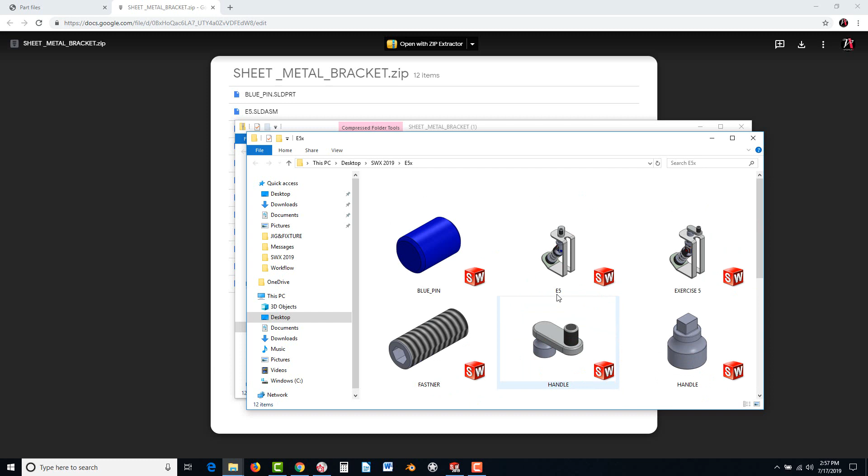Go ahead and start up SolidWorks and go to File, New, and select Assembly and hit OK.

On the left, if there's any parts that are currently open, they'll be listed and allow you to select from those. In our case, we need to direct it to the folder, so I'm going to go to Browse and find my E5x folder. Over here again, if I want, I could click and enlarge these so I can see little images of what they look like. We're going to start off with the sheet metal bracket. Select it and hit Open.

Now, you'll see you can move it and position it on the screen, but I would suggest clicking on the green check mark in the upper left corner. This will drop that part, and that part's origin will lock into the origin of the assembly, so they'll match up. The front plane will match with the front plane of the assembly, and the top and right planes will all align to each other. The very first part that you drop into SolidWorks is typically fixed. You could tell by this little F in parentheses. If you were to right click, you have the option to float it, but we don't want to do that, so we're going to leave this currently in its fixed state.

Let's begin by adding some additional parts. Go to Insert Component, go to Browse, and let's select the yoke male. Hit Open. This one, we actually want to drop not centered on the origin or fixed, just over here to the left, floating by itself. Simply click, and now it's positioned there.

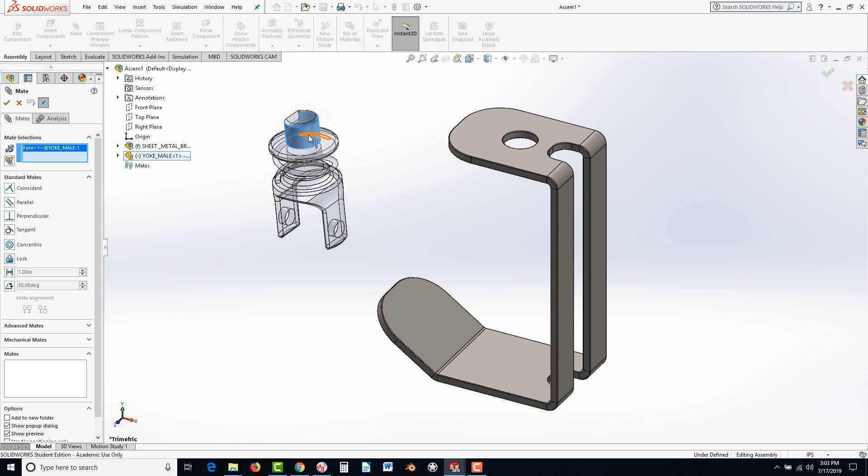So let's go to mate, the paper clip up there. Select this pink surface. We want that pink surface now to actually contact this surface here. Now be careful, you can select the edge—right now I'm hovering over an edge, and you can see it highlights an individual edge there. When we go over the surface, to the right of the pointer we get a square, and that's an indicator that the whole surface is about to be selected.

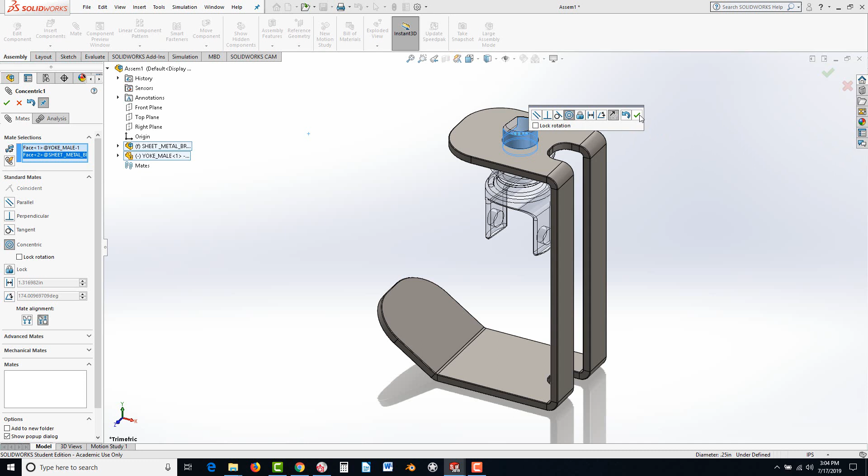Let's go ahead and select that surface, and what it will do is move the part over, and it will automatically pick, based on some assumptions it makes, what would probably be the most likely solution, and in this case it went with concentricity. If we wanted something else, we could perhaps select that, but just be aware you might not have the proper ingredients on the screen to do that. But let's leave it at concentric and hit the green check mark. And up here in the upper left, go ahead and hit the green check mark to exit the mates.

Now let's take a look at what we've just done. Grab the actual yoke with your pointer and your mouse button, hold it down, and now you'll see you could actually drag it up and down vertically, but you can only spin it. It no longer translates or traverses along the X or Z axes. And that's because when we went with the concentric relationship, we've actually removed those degrees of freedom. Ultimately, your goal is to try and remove degrees of freedom to get this in position.

However, if you want to simulate what's called dynamic assembly motion, to somewhat see how parts interact with each other, you don't necessarily want to completely remove those degrees of freedom. So we do want to remove its ability to move up and down, but that's about it. We do want it to swivel though.

So let's click off of it somewhere, and let's go back to Mate and select this flat face. Now actually I'm going to hit the escape key for a moment, and I invite you to do the same. I want to show you what's called the selection filter.

Right click in the upper right corner in the gray area and find Selection Filter in the lower left. It will appear as a series of icons. You could filter out edges, faces, surfaces, bodies, and annotations. We're just interested in filtering faces, and the hot key for that is X, so you could use that instead of the icon.

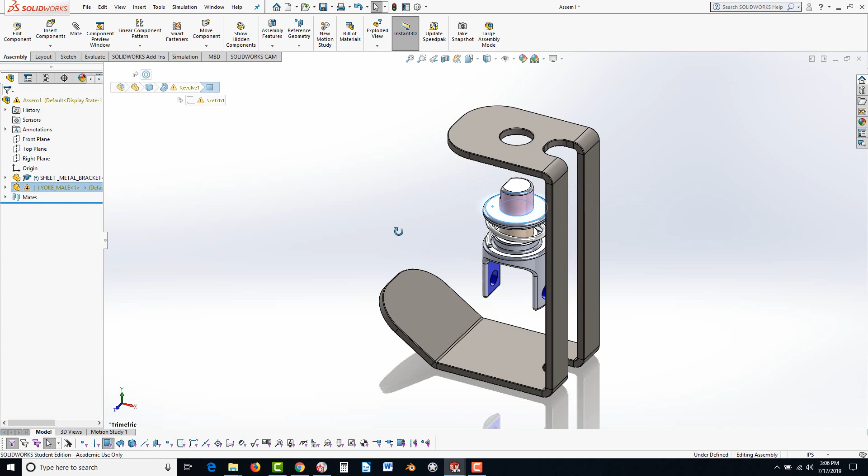Go ahead and select this face here, then rotate your model. I'm holding the middle wheel and moving my pointer up, rotating so I can see the underside of the sheet metal bracket. Go ahead and click on that surface of the flange.

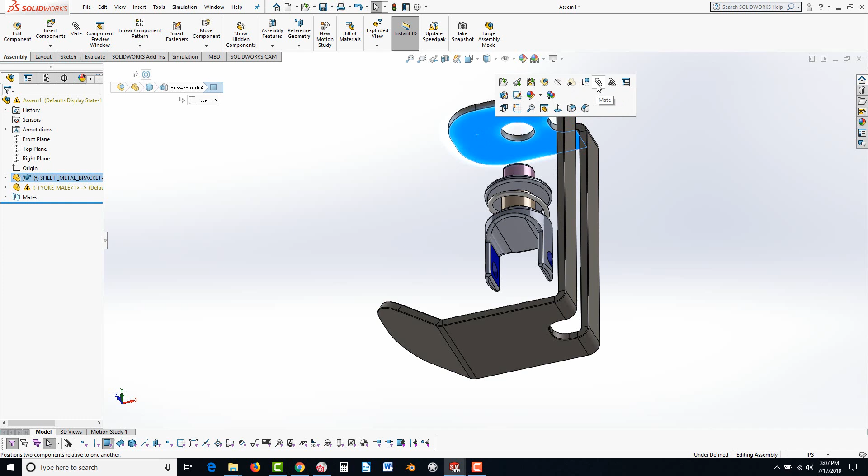One thing I neglected to do was hold Control to select both entities, which I didn't do, so it deselected the last surface. More importantly, we should have selected the Mate tool first. I forgot to select it, so make sure you select Mate. I selected it from the Quick Launch, but you could also select it up here on the ribbon.

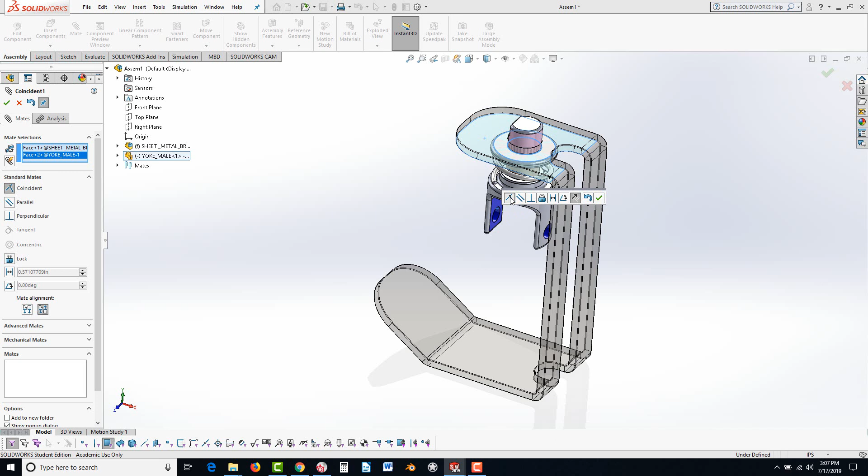Now I'm going to rotate back down with the middle mouse button, hover over this surface, and select it. You'll see in this case it went with a coincident relationship, or Mate, so it's actually contacting surface to surface on those entities. Let's hit the green check mark, and hit up here as well.

Now try to drag that component. As you grab it with your pointer and try to drag it downward, you'll see those degrees of freedom, the Y in this case, are no longer there. It will only swivel in position. In many cases you do fully constrain these entities, but here we want to simulate dynamic assembly motions, so we'll leave this open so it can still swivel in position. Go ahead and hit escape after you've applied that.

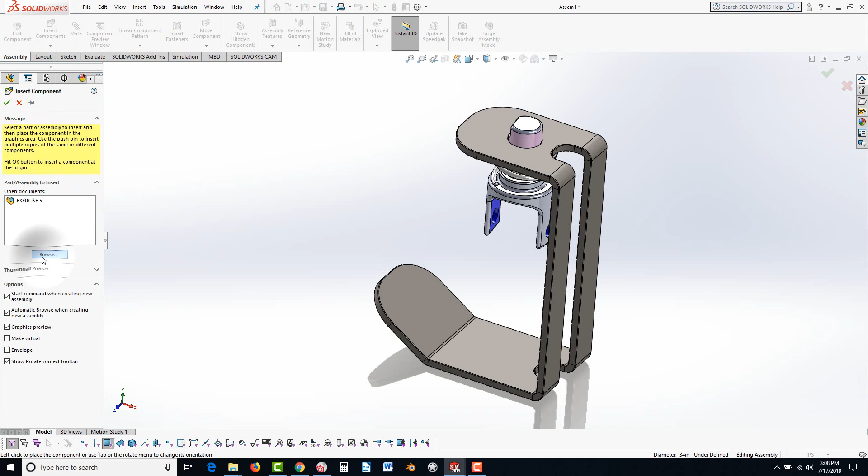Let's move on to the next part. Go to Insert Component, go to Browse, and the next part we want is the spider hinge. Select it, hit Open, get it between the legs of the yoke, and click to release it.

You'll see there's colors on these surfaces, we have blue and we have red. Right now we're just going to focus on the blue surfaces. For example, this blue surface here and this gray hole, we want to match those up to the holes over here. So let's go to the Mate tool.

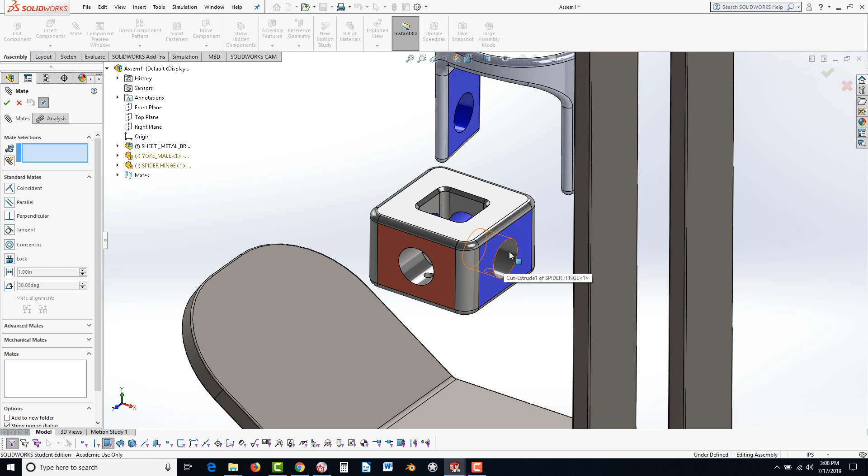Select the gray hole that's adjacent to, or perpendicular to, this blue surface. Click on it one time, then select this blue hole on the leg of the yoke. Either hole doesn't make a difference. Go ahead and select, and you'll see it position itself. Go ahead and hit the green check.

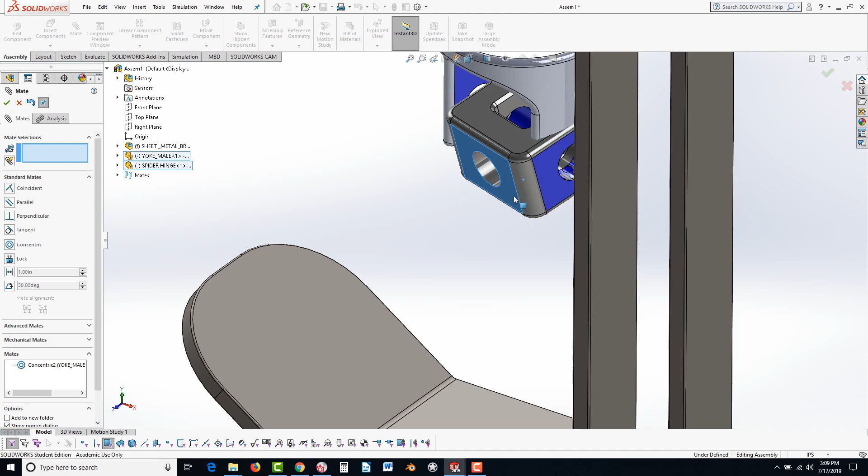Now let's see what degrees of freedom we've just removed. Try grabbing that red surface and dragging it with your mouse button depressed, and you can see it still rotates, but it's not locked fully into position. So I'm going to move that out a little bit and rotate here.

The next mates we should logically try to apply would be this blue surface right here, and rotate around to this surface here. Now be aware, if you try to select this blue surface, watch what happens: it actually ends up connecting to this surface, and then they're on top of each other. So we don't want to do that.

There is an option to resolve this, and it works much of the time but not all the time. It's called flip mate alignment, and that will reverse it. But under certain circumstances it does have some issues, and in this case I've seen it fail to work the way I'd expected.

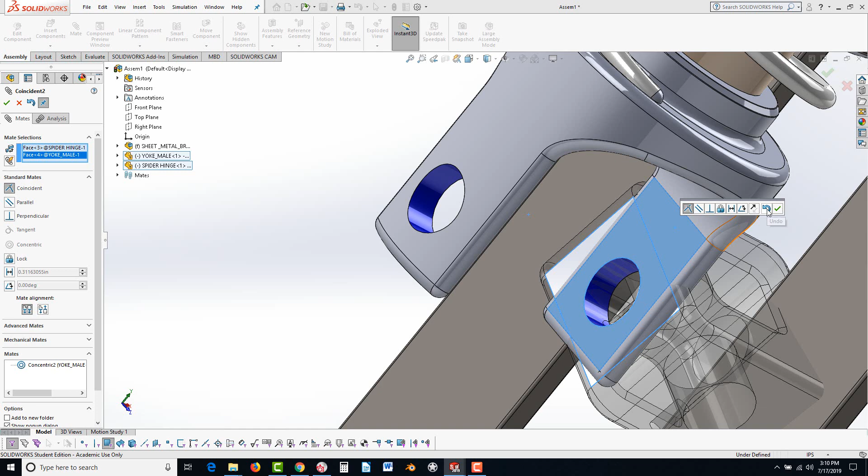So let's just hit the undo button right here instead, and make sure we select the proper faces this time. So this face right here, to this face over here. Hit the green check, and hit the green check at the top of the feature tree. Let's zoom out a little bit.

Now you can see this will pivot, and then if you release it and grab the yoke, it will rotate.

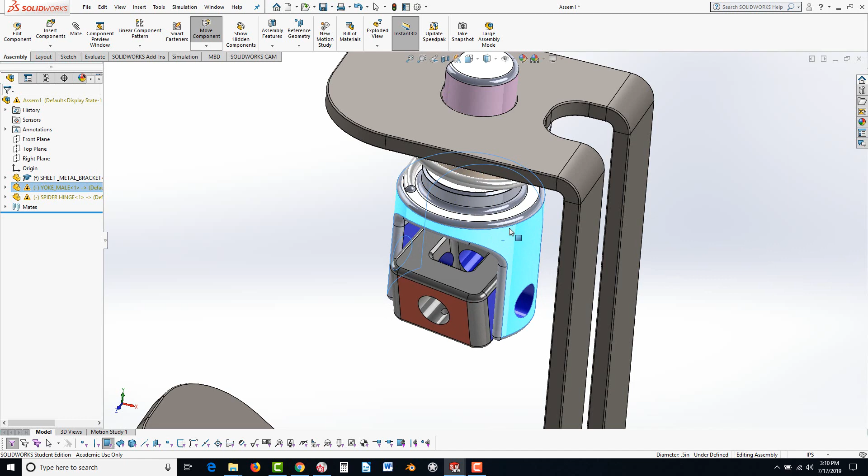Let's continue on with the next one. Let's go back to Insert Component, Browse, and this time select the yoke female, hit Open, and position that right about there.

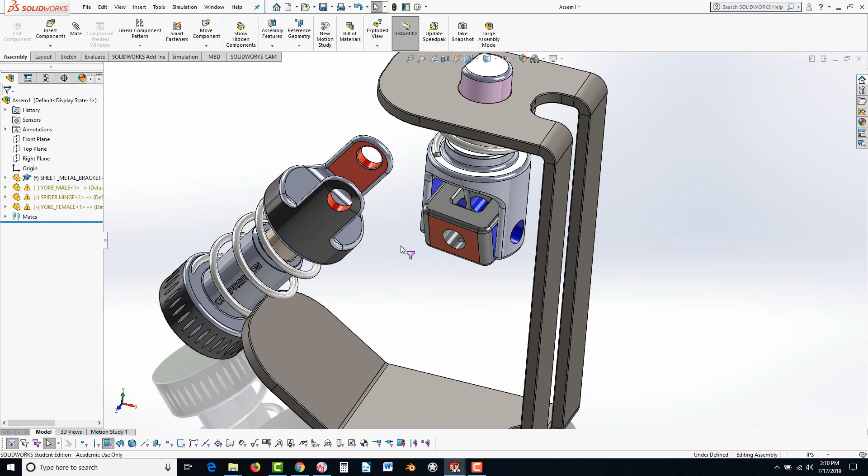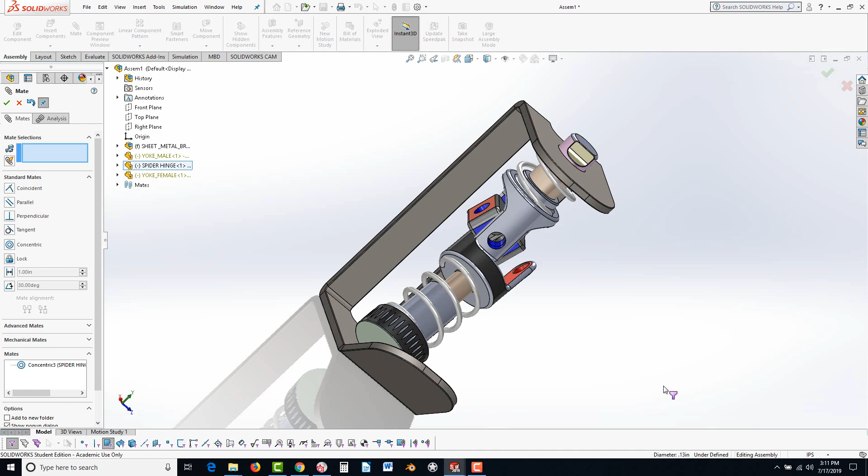Now we're going to look at the red faces that we want to attach. Select one of the red faces on the yoke female, go to Mate, and select the gray face perpendicular to the red flat face on the spider hinge. Hit the green check, and now mate those closest faces: the red face on the inside of the leg of the yoke to the red face directly across from it. Hit Apply and hit the green check.

Now let's take a look at what we've accomplished. Go ahead and grab this part. You'll see it swings like a bell. Now position it so that the base of this, what looks like a plunger, with a little pale green surface, matches up to this angled sheet metal flange.

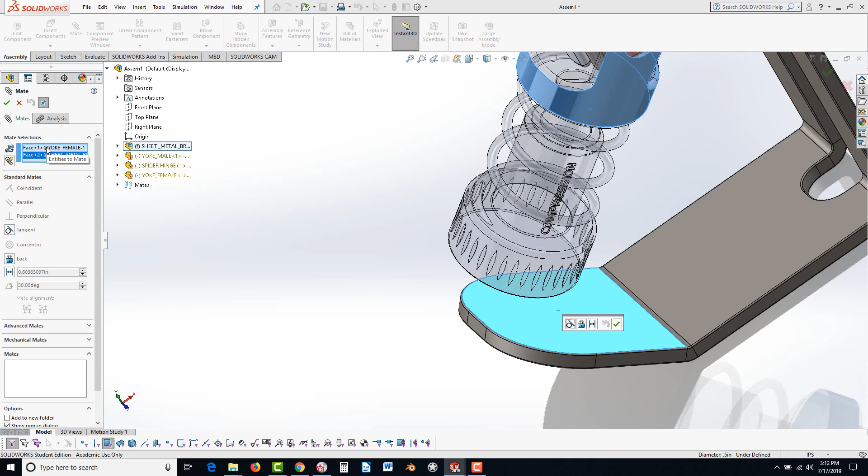So let's go back to Mate, select the angled sheet metal flange. Now be careful, I accidentally had the yoke female pre-selected, so I'll right click where it says that and delete it. Now I can select the underside of the plunger, that green face, and it should automatically go with parallel.

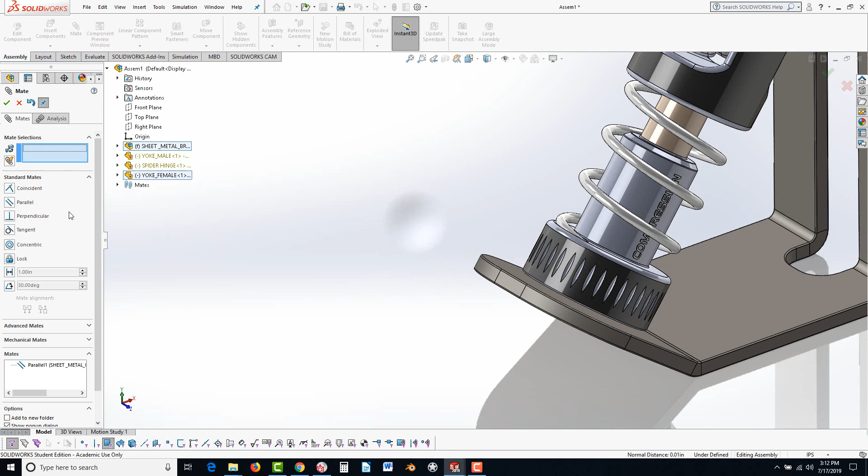The reason it went with parallel - if you hit the green check here and here, hit the space bar on your keyboard and go to the front view orientation and zoom up, you can see the reason it picked parallel is because there's actually a distance gap between the two.

This is a very likely scenario when you're modeling assemblies - there's always a little clearance or tolerance between them. There is a tolerance stack analysis tool inside here. We're not going to cover that right now, but be aware you could probably find a YouTube video or two that shows you how to use that if you're interested in tolerance stack analysis.

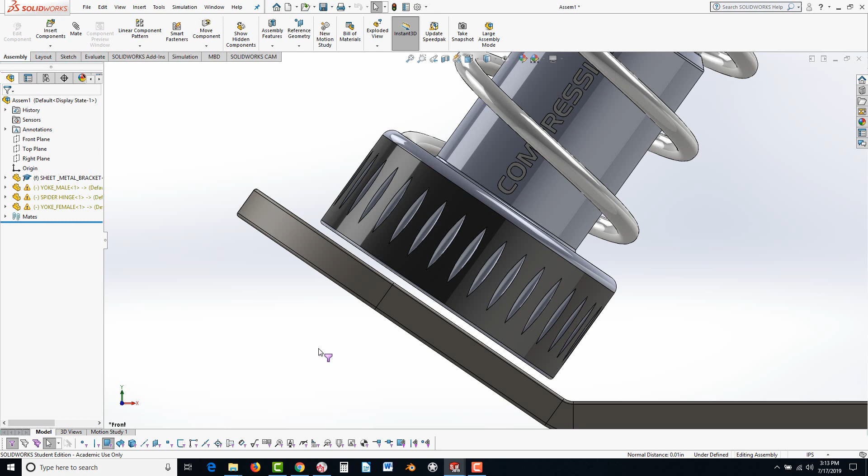Now we're going to take a look at what we've done. Grab this top pink surface here with the pointer and make a small circle as you draw around here, and you'll see the parts interacting with each other - this is what we call dynamic assembly motion. It's not a full simulation, it's not giving you friction or any sort of dynamics data, it's just strictly kinematics.

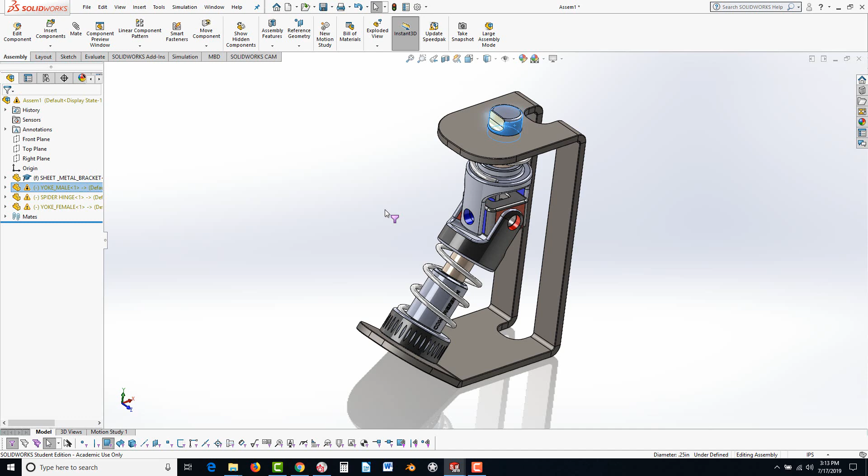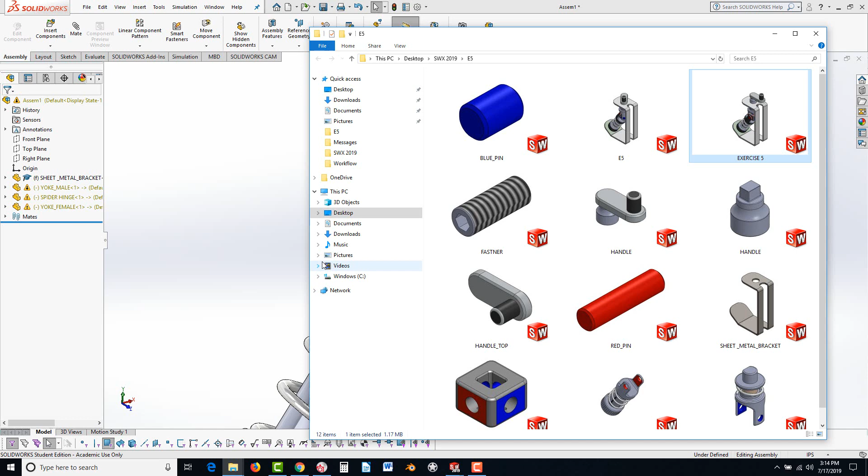Now we're going to put in some pins. Another option, instead of going to Insert Component, is to find your folder here. If you have dual screens or multiple screens, this is an excellent option - you could have all of your parts here. Let me go to View and View Large Icons, make them a little smaller so I can squeeze this down to fit on my screen.

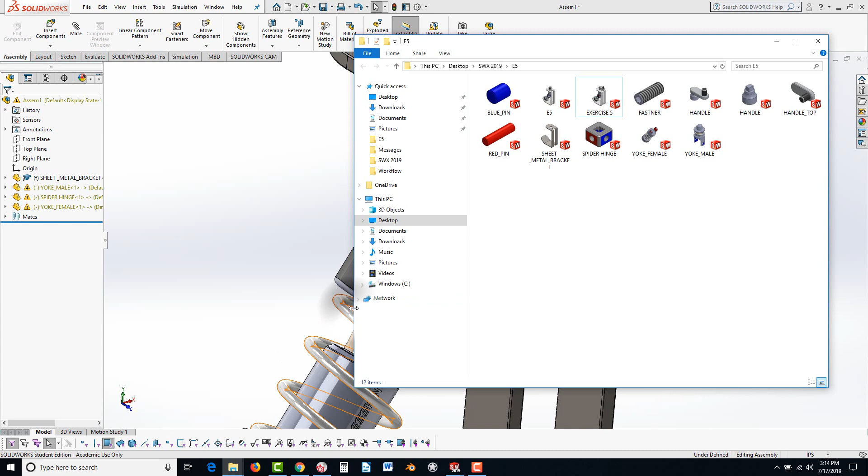And you have yourself a little library you could access without having to use the tool as I was showing you before with Insert Component and Browse. Now you could just simply grab these and drag them over. We could have done this from the very start - I was just showing you the general way of doing it - but now we're going to grab a red pin and drag it in.

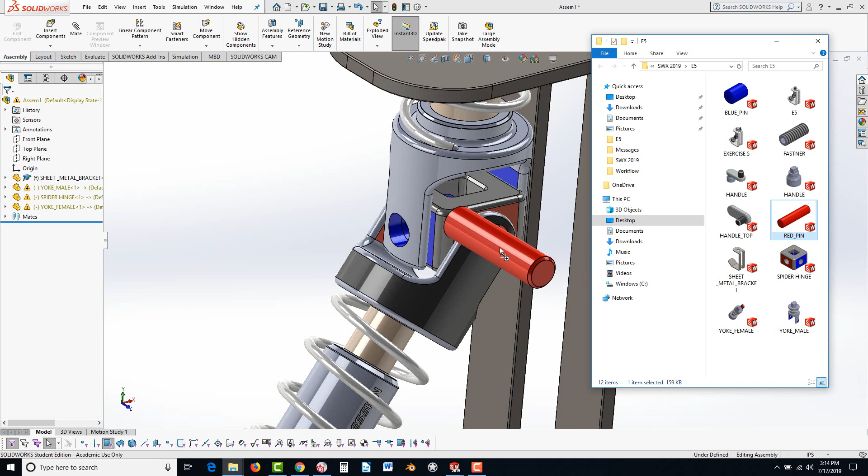The neat thing when you do this: get it close in proximity to where you want to drop it and release it. Now we can go to Mate, click on this surface here to this surface - basically select the red shaft to the red hole and hit the green check. Now to push it in, you'll notice you can grab it with your pointer and drag it in, but that's still going to float.

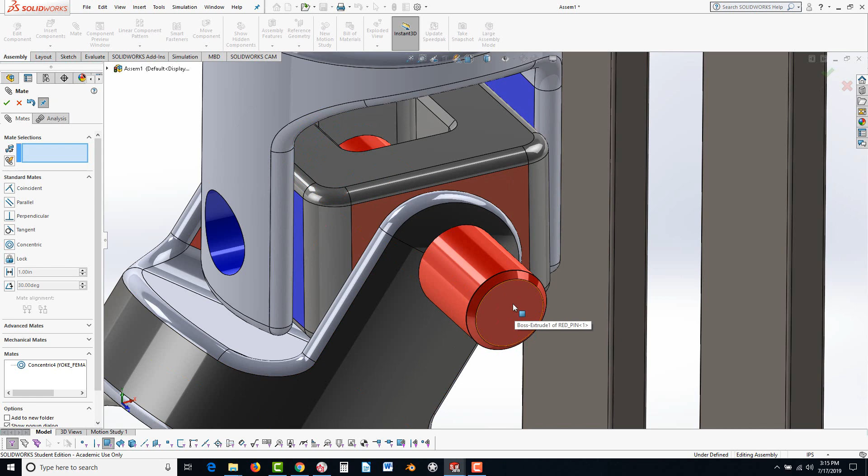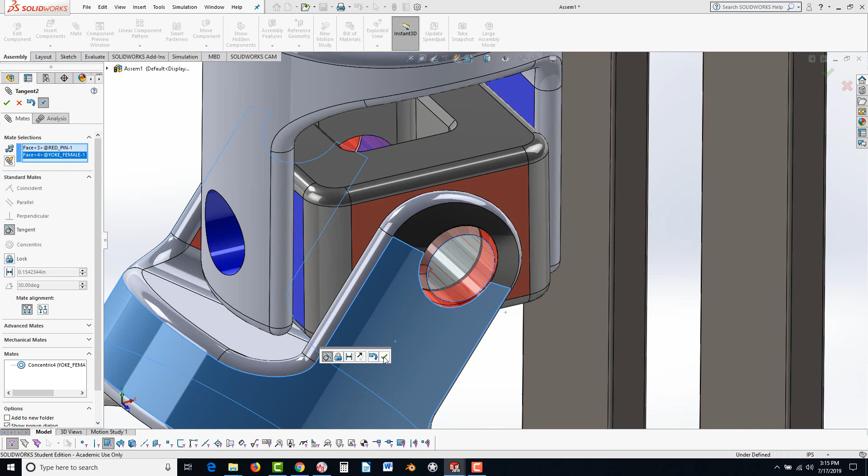What we want to do is get this flat end of the red pin tangent to this black surface on the outside of the yoke female. So let's select that surface, and you'll see it will automatically push in - look at the option it selected automatically for us, tangency. So now that flat surface is tangent to the exterior of the yoke, so it's flush. Hit the green check, and hit the green check up on the mate tools, and now we've inserted our red pin.

Let's get a little more complex here and bring up our tools again. You're welcome to go to Insert Components and browse for these parts if you don't like it on single screen here.

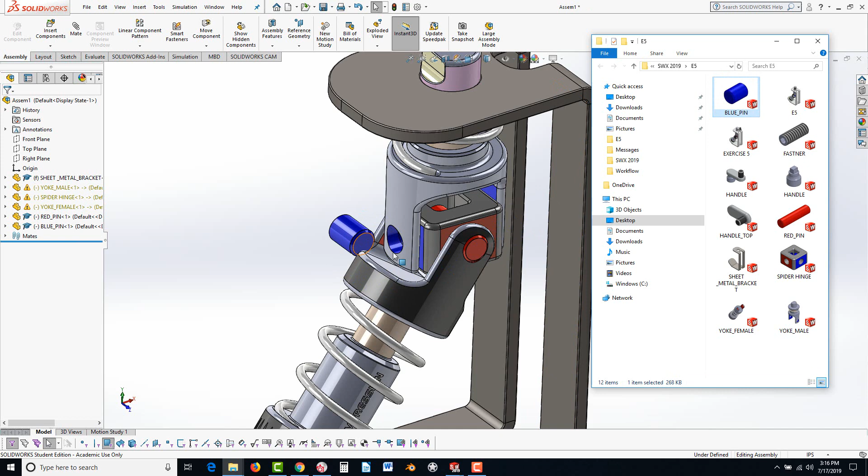But let's go with the blue pin now, and let's try that one more time. Drag that in and just drop it right there. Let's go ahead and select this surface, go to Mate, and select the blue surface. Hit the green check. Again, this one we're going to make tangent.

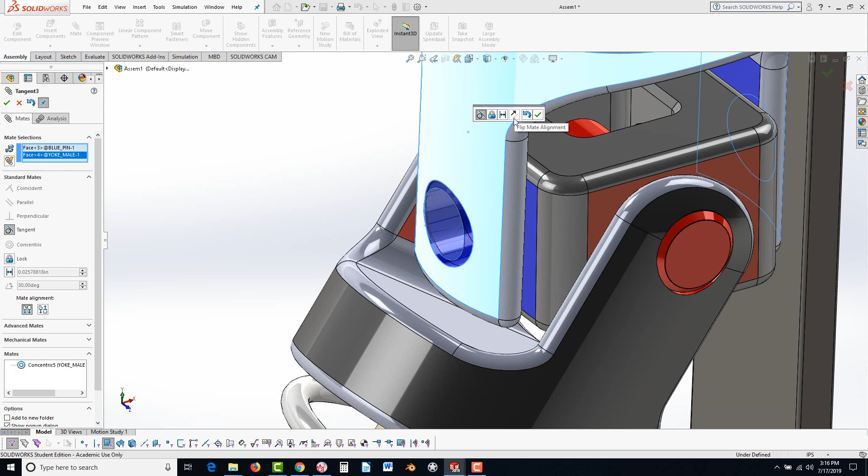Select this end face of the pin and this gray face of the yoke male, and it should automatically go with tangency. Now if it's flipped to the opposite side, try using flip mate alignment, and that will rotate it 180 degrees. Most of the time it's successful, but there are times when you might have a collection of mates that makes it non-conducive.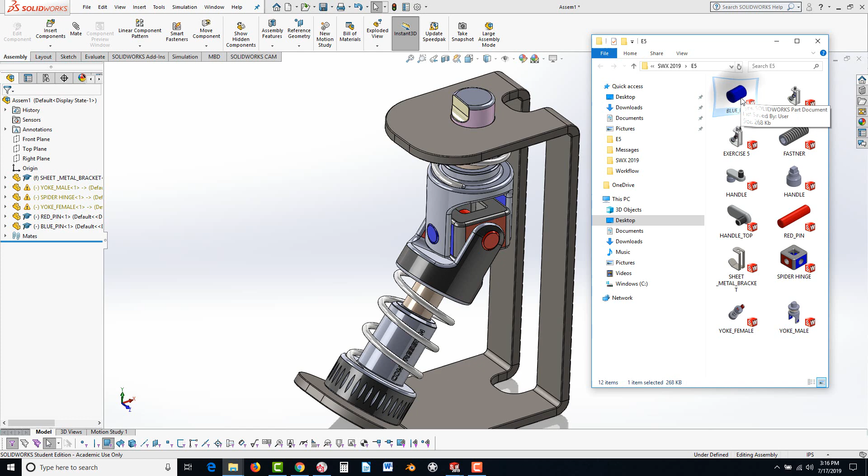Let's go ahead and hit the green check. Now what I'd like to do next is show you another technique for inserting parts, and this adds some additional functionality. Let's go back to the E5 and double click on the blue pin. It should open up the blue pin in its own view screen, and we could go to Window and Tile Vertically.

Now we could see, we're going to get rid of this one right here because we don't need that, that's an old one. Now we could hit Window, Tile Vertically again, just to maximize screen space. Rotate this around the assembly so you can see the back side, and you can see that blue hole.

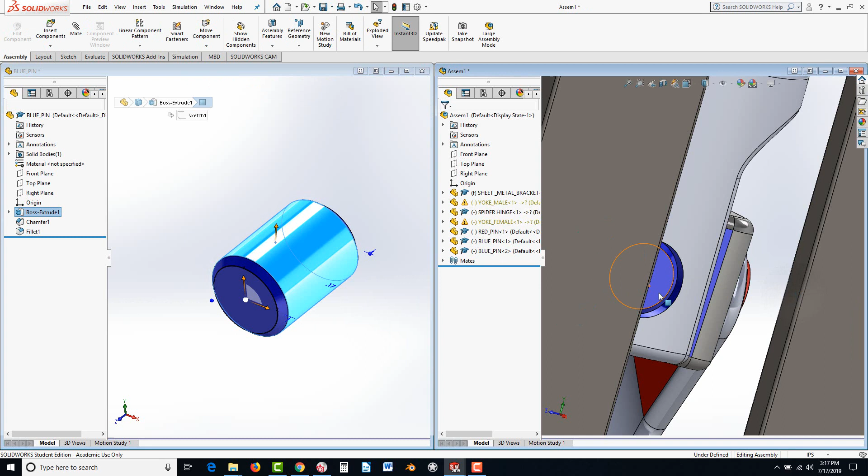Grab this blue cylindrical surface and drag it into the hole, and you'll see some little symbols to the right of your pointer, two concentric bodies that are aligned. When you have that, release it, and now you've automatically established a concentric mate just by dragging it in that way.

Now we could go ahead and click on this surface, go to Mate, and select this surface to make it tangent. Hit the green check. You could close that pin, and you don't have to save it. Oops, I shouldn't have discarded those changes, but that's okay.

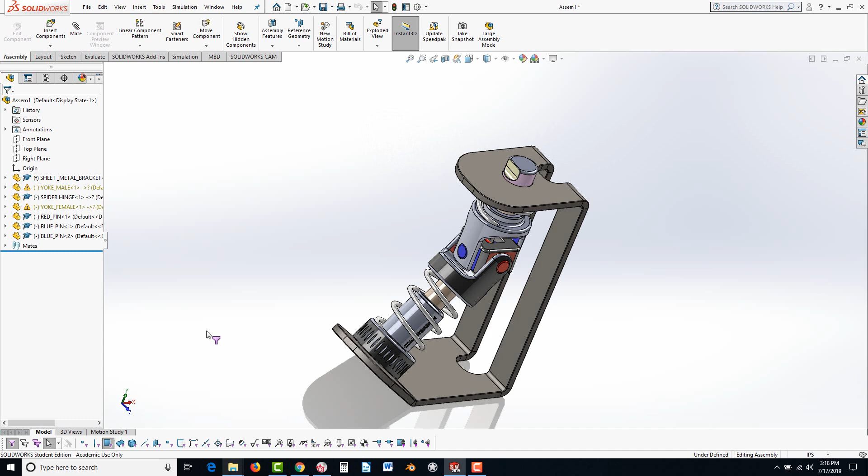All right, the next thing we're going to do is go ahead and drop in a subassembly. So we'll maximize this, and we'll bring that through the Insert Components here, and select the handle subassembly.

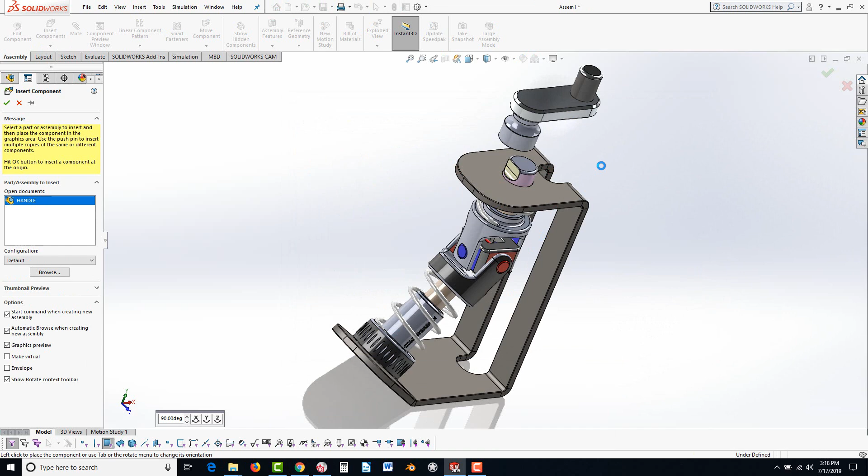Now be careful, this is an assembly document. There is something called the handle, and it's part of the handle, it's the base, so you don't want that part that's next to this. We want this assembly. Hit Open, and just click up here to release it nearby the top of the head.

You could grab that, notice it moves as one, and if we look at the feature tree, you'll see that subassembly is recognized, and there's two parts: the handle top and handle. So let's go ahead and mate this.

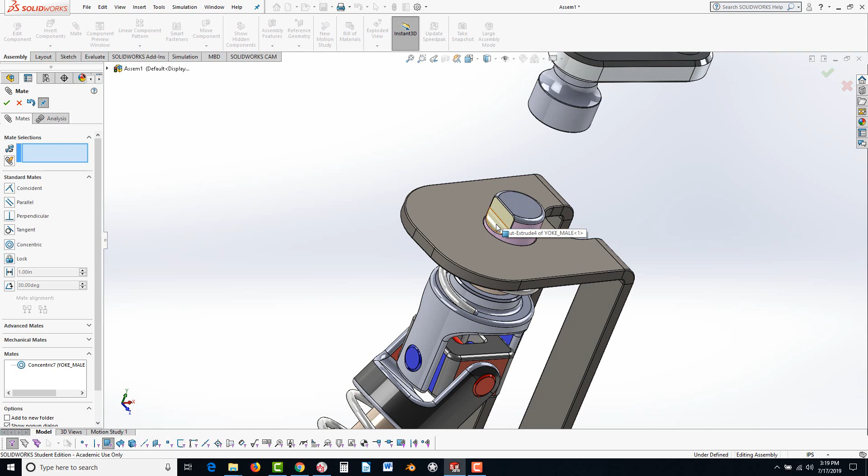Go to Mate, select that cylindrical face there to this face here, and now drag this up and find the yellow flat face right here. Now be careful, there's a radial yellow face, stay away from that one. You want this flat face. And that notch, basically a keyway, you want to select this face right here to align the two.

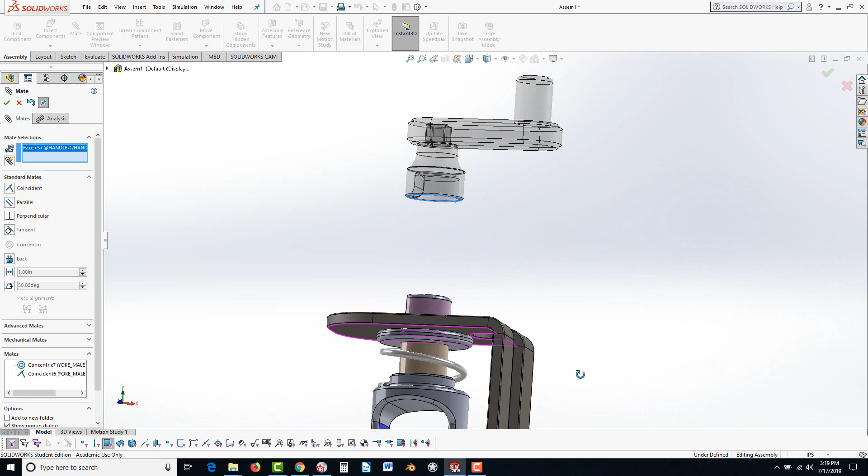Notice I was in Mate while I did that. Now you'll see this underside green ring. Select that surface, and then go ahead and select the top surface of the sheet metal bracket. Now, here we see there's a distance option. Go ahead and select that.

We could specify how far we want it to be positioned, and again, this is a more realistic approach. Generally with parts, they're not always going to be line-to-line fits. Actually, very rarely are they line-to-line fits, and so for this one we have accommodations for a distance gap between those two surfaces.

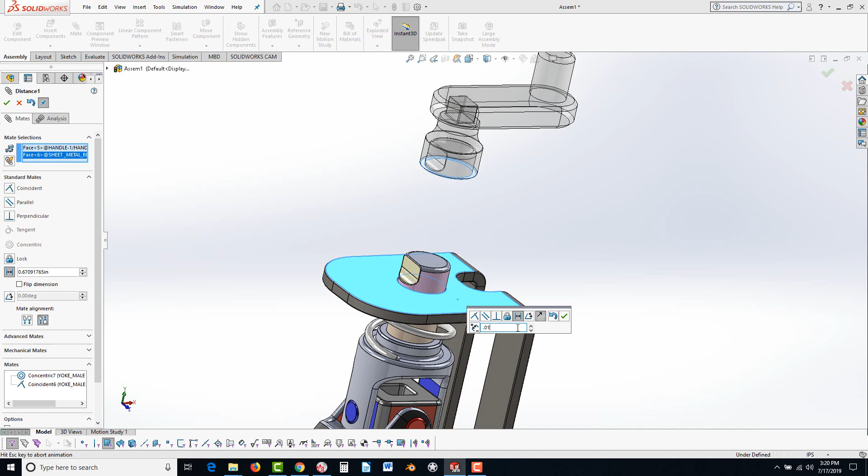So let's go ahead and set it at 0.01 and hit enter, and you'll see it will reposition itself. Hit the green check. If you rotate around, you'll see there's a slight distance gap between the two that we've added. Hit the green check.

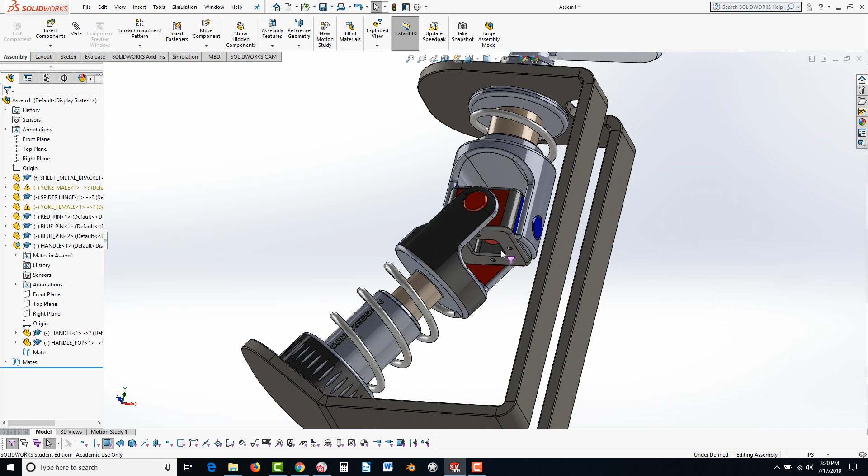That pretty much concludes this. There are some additional holes for set screws. If you want to challenge yourself, you could bring in the set screw. I'll start off with one of them.

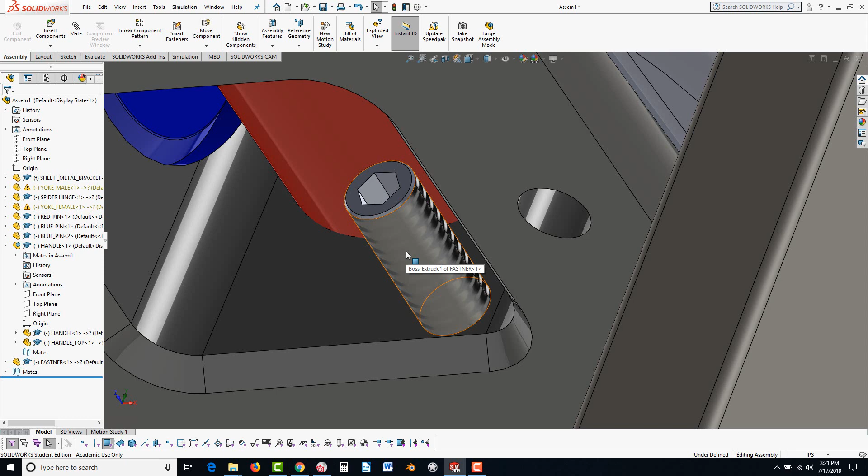I'm going to go over here, select the fastener, and just hit OK there and get it close to position where I want it. Hit escape and rotate. Now we want to lock that in, so I'm going to show you another little neat trick. If you hold the Alt key and then depress your mouse button on the thread, drag it to the surface of the hole, and you'll see it will position itself.

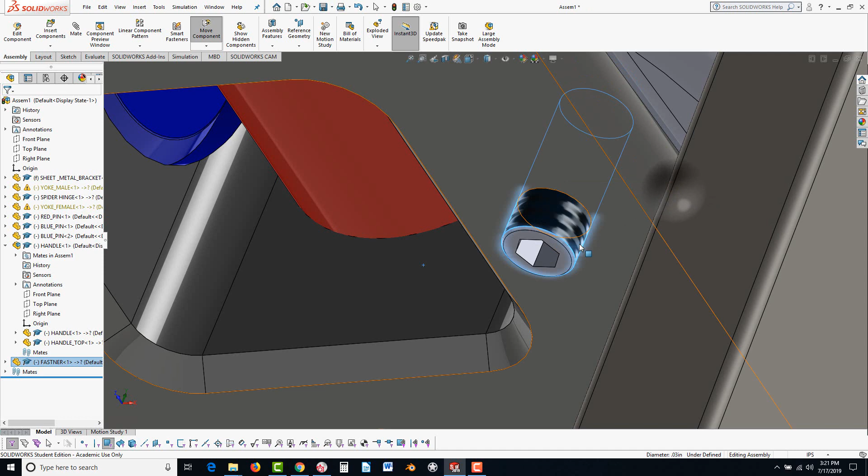And release it. Now if you need to flip it, there's a flip mate alignment. You could hit that and then hit the green check mark so that the socket is facing outward.

Now go ahead and let's repeat that again. Hold Alt and select this surface and drag it to this flat surface. Hit the green check and hit escape.

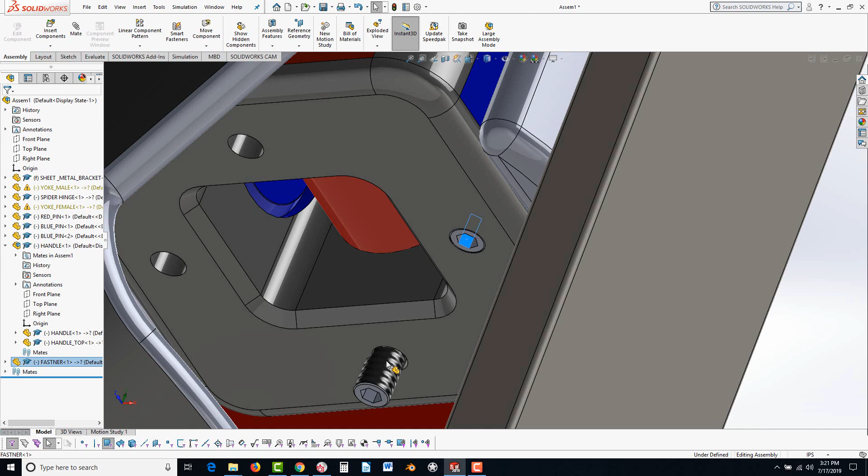Now you could do it the traditional way that we just went through. If you want to make a copy of this, here's another little trick. Hold Control, grab that, and drag it out, and you could get it close again approximately there. So just holding the Control, you can make additional copies of the part.

And we'll do this more traditional method. We'll go to the Mate tool and select the hole to align to, and then this face to this face right here. You could go through and add the additional ones if you like.

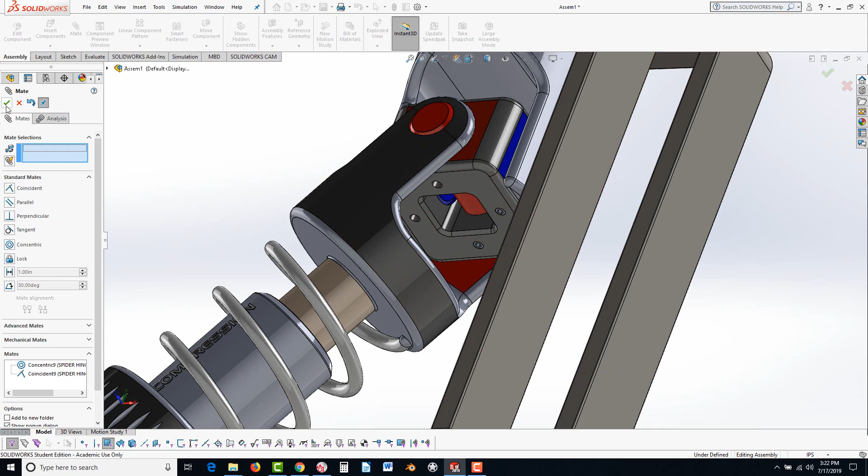That pretty much concludes that exercise. Now the lab, which is in the training guide, if you go to Britannia1.com, go to Instructional Manuals and SolidWorks Basics, it'll be under Exercise 5. And I'm going to scroll to that.

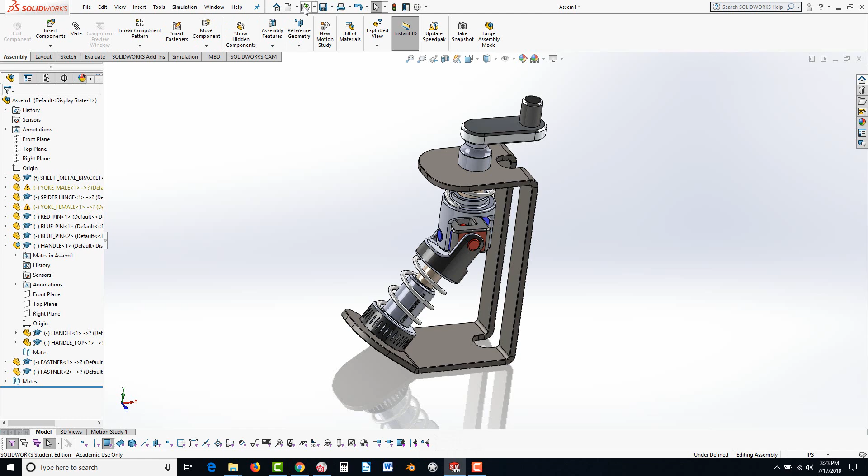So let's begin. Let's bring up SolidWorks here and start a new assembly. Hit OK. And I'm going to hit Cancel here, and I'm going to use the little method we saw earlier where we could just drag and drop these in.

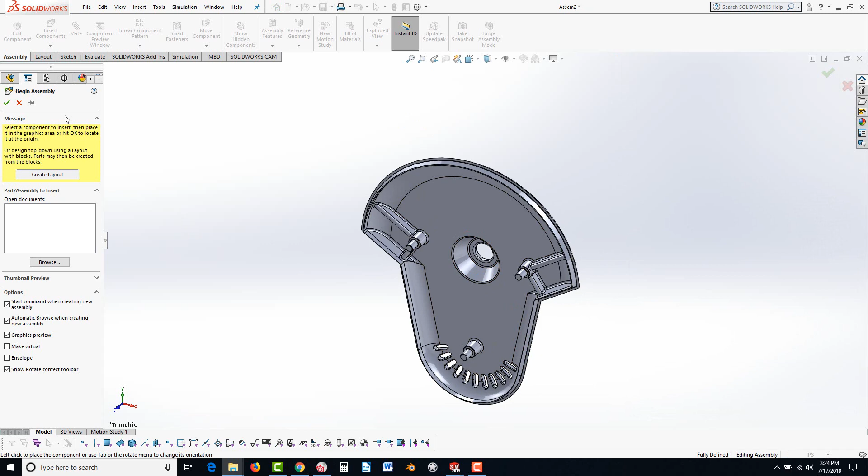So I would recommend starting with the rear bezel. You just drag and drop that in and hit the green check. And you'll see it's fixed in space, so now we could drop other parts in as well. So I would bring in the circuit board or the PC board at this point in time. Just drop it in. And you can mate these.

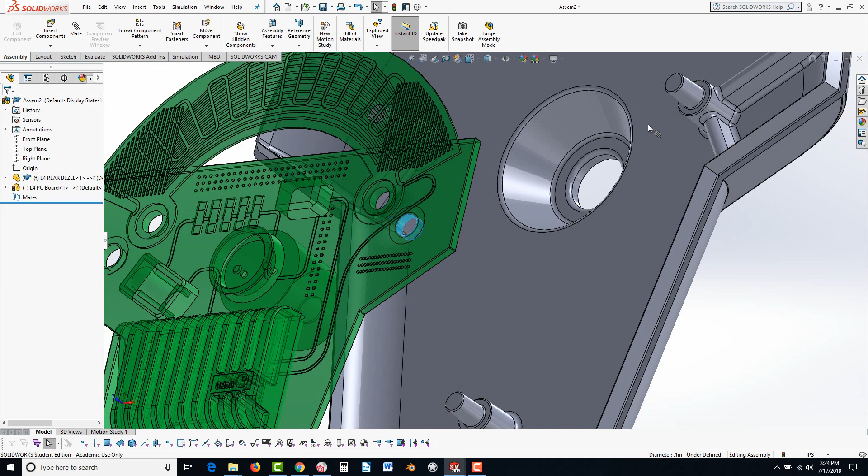Now you could use the trick of the Alt key if you like. Grab this surface here, hold Alt, drag it to this surface here, release it, hit the green check. Do the same over here. Now be careful, there's two sets of holes. That one's for the light pipe. We're going to do that later.

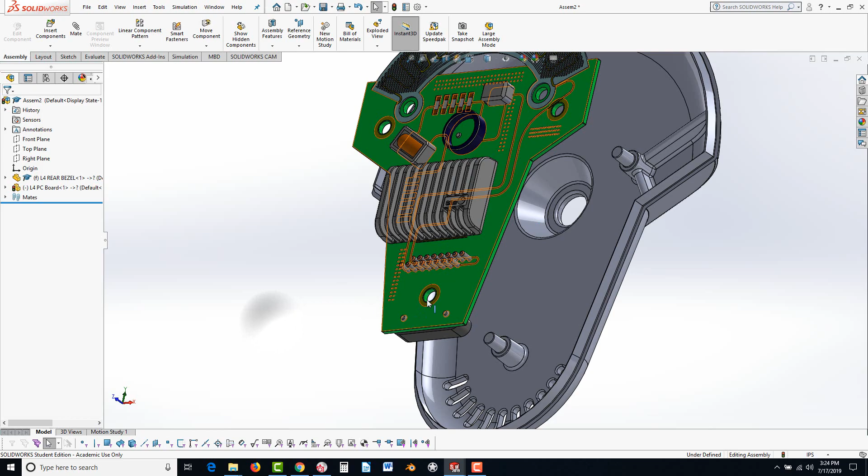Hold Alt, drag this to this surface here, release, and drag this up now. And you could just go to the paper clip if you like and select the underside surface of the green board to this tier right here. Hit Apply. Let's bring in the next part.

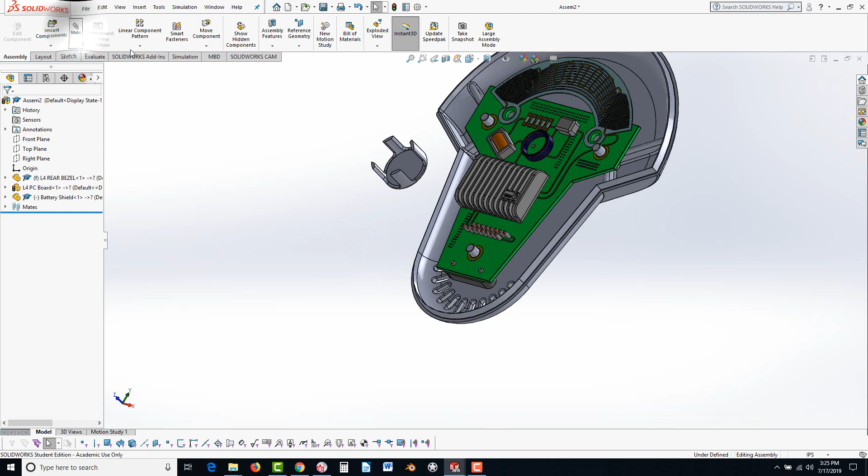We're going to bring in the battery shield. Drag and drop that in. And we'll go to mate. This underside surface here to the top of the rubber grommet right here.

Hit the green check. It's not going to position itself. Drag it over. And now we can mate this cylindrical face to the face of the rubber grommet. Don't forget to turn off your selection filter also. In my case, when I started up a new assembly, it automatically did that. But just remember to turn it off. You can just deselect it, or deselect this one right here.

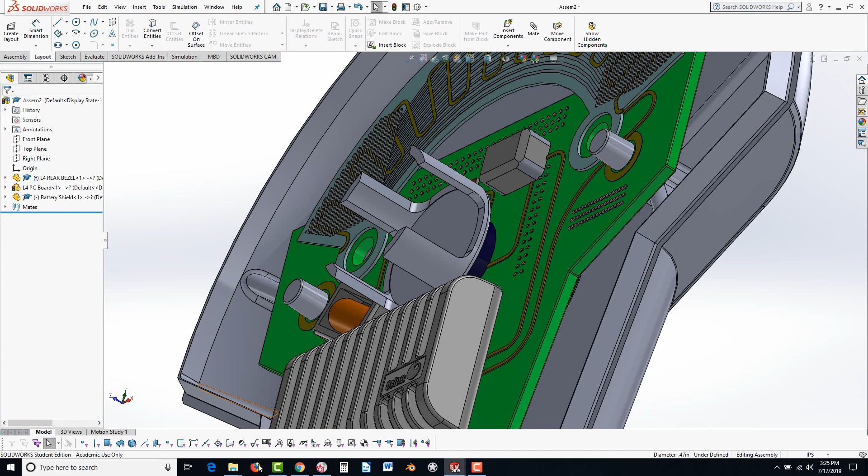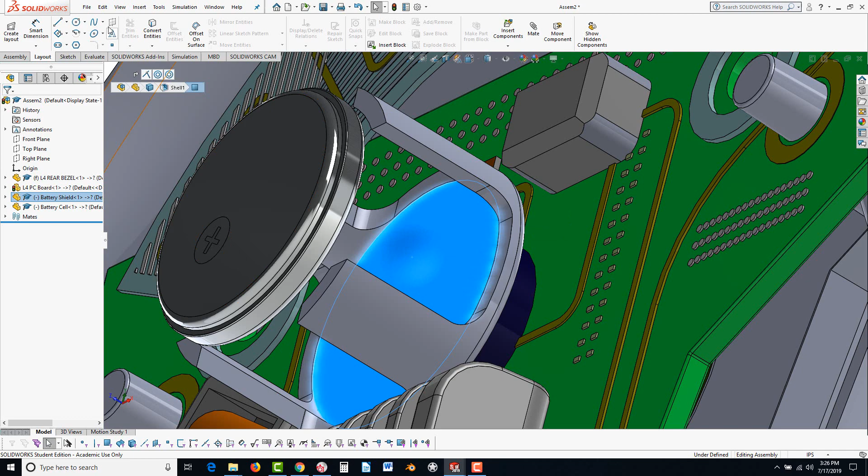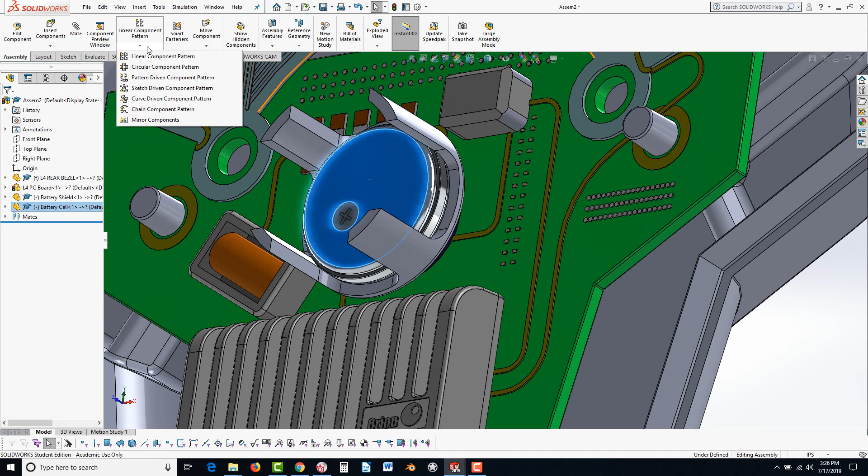And I'm going to go ahead and show you a little trick for patterning parts. We need 4 of these stacked on each other. So you can select the part, go to linear component pattern. Select like an edge right here for the direction, so we're just selecting a vector essentially. So it can be any one of these edges.

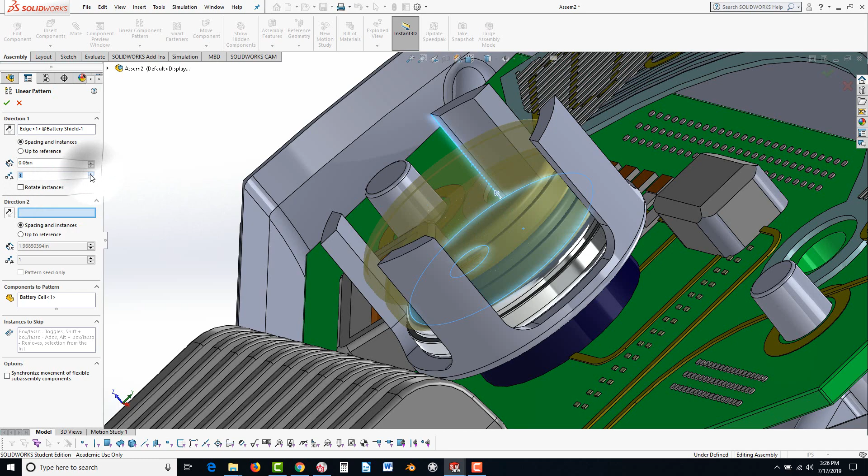There we go, you can see the arrows pointing up, so it's going to stack them upward. Put in the distance, and it's 0.06, and we want 4 of them. You can see as you increase the number, the preview shows them stacked. Hit the green check - there we have assembly patterns.

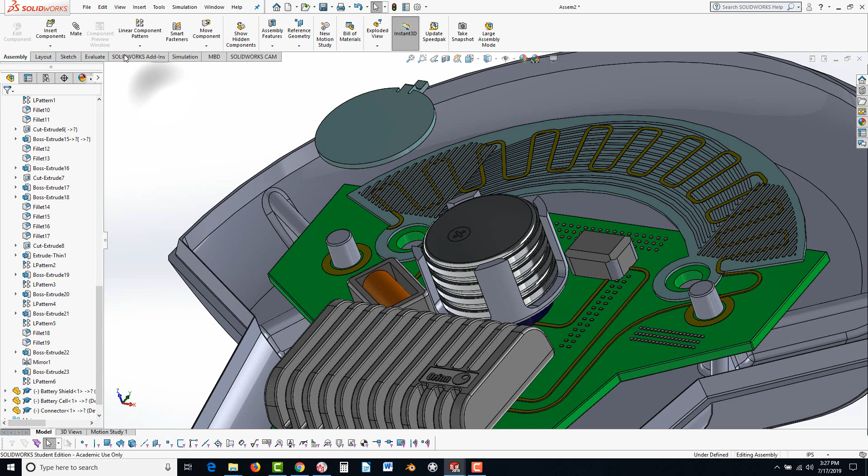Now we'll go ahead and bring in another part. Let's bring in the connector, drag that in, escape, and let's go to mate. Select this face here to this surface here, and then drag it up, and then this surface here to this surface here. So they're like stacked, and straighten that out.

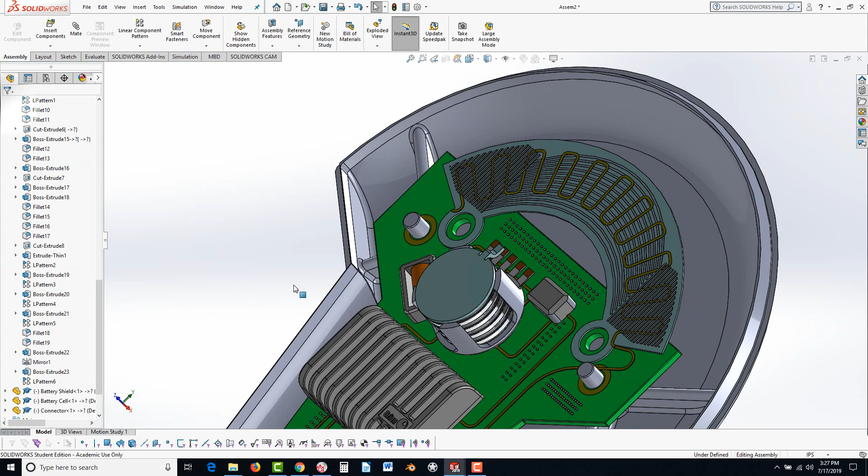Now let's bring in the light pipe, the light frame - just drag that over here. Now transparent objects can be a bit tricky to work with. If there's something behind it, it selects through the transparent object, so Shift will allow you to select a transparent object if you're not able to normally. But we don't really need it just yet.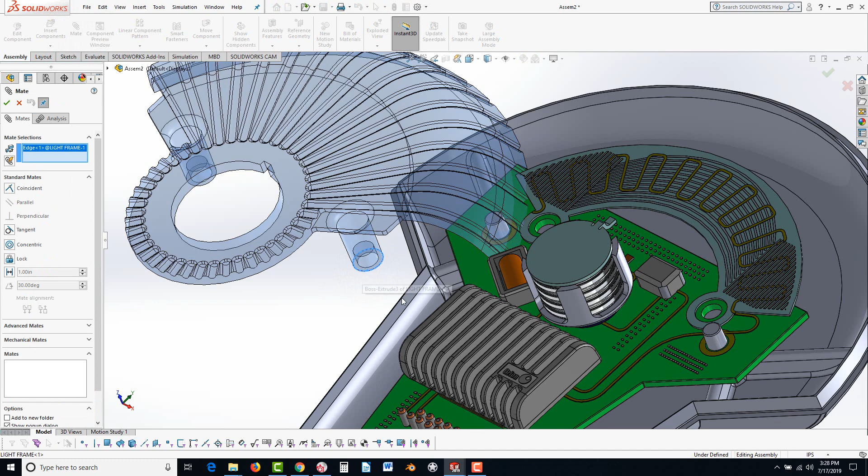But let's go to Mate. I'm going to go ahead and mate this edge now to this flat green surface here, and then select this surface here to that hole. You'll see it's difficult to select now because it's transparent - if you hold Shift, you should be able to grab it, and you'll see that that is still floating a bit. So I'm going to hold Shift and select this face, and then this face right here. And now the light frame is secure.

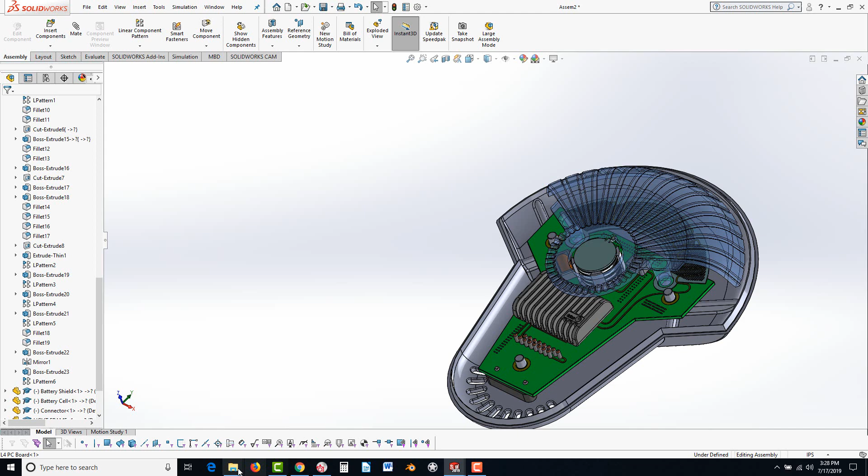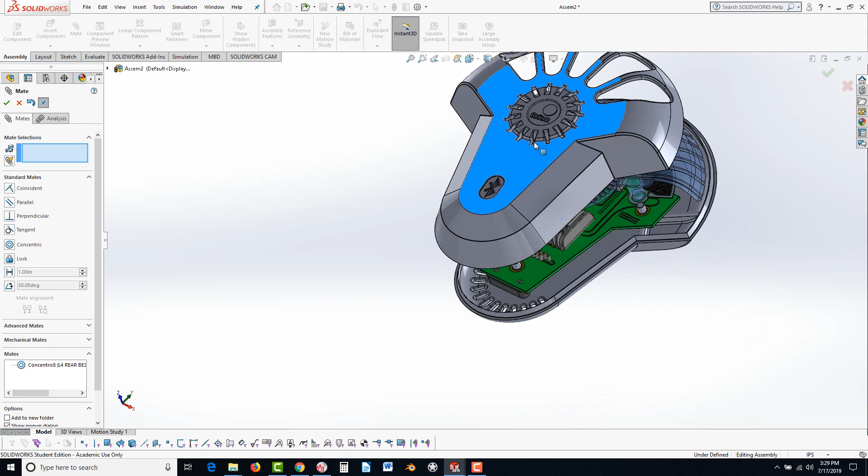Let's get the other part on here. Find the front bezel, drag that in, and we'll proceed with mating this. Let's select this face to this face, we'll pull that up a little bit, and then this face to this face. Be aware you can't select the fillets to mate to.

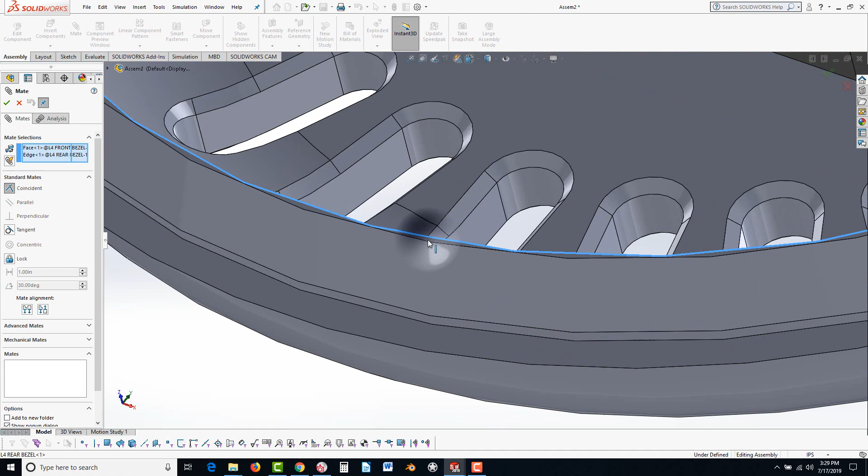And then let's go back to mate, and then this face here to the top of this flange. And there should be a little gap between it.

Okay, now we're going to take a look at how to explode this. Exploded views are very useful for drawings especially, or anything. Go to Exploded View, select this part - you'll see you can position in X, Y, and Z. We're going to grab the Z arrow with our mouse button depressed, drag it forward.

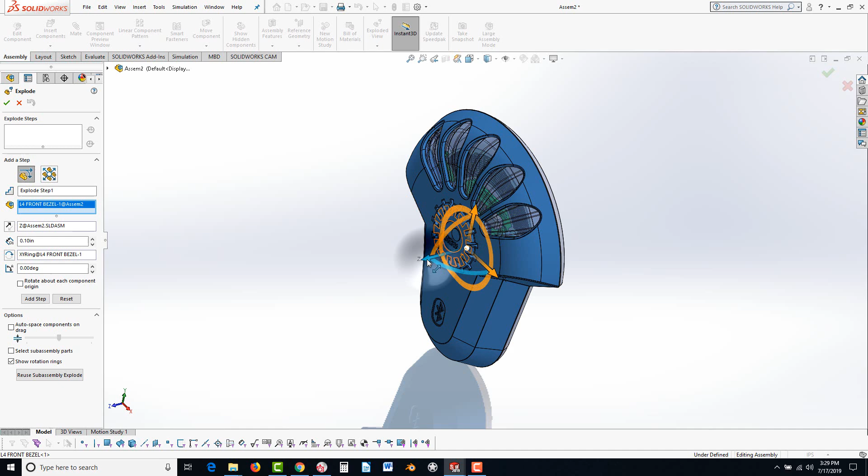You see a little ruler so you could accurately position this. Let's go 4 inches roughly. And then click on the rear bezel - and unfortunately, you'll see the rear bezel was part of that last move.

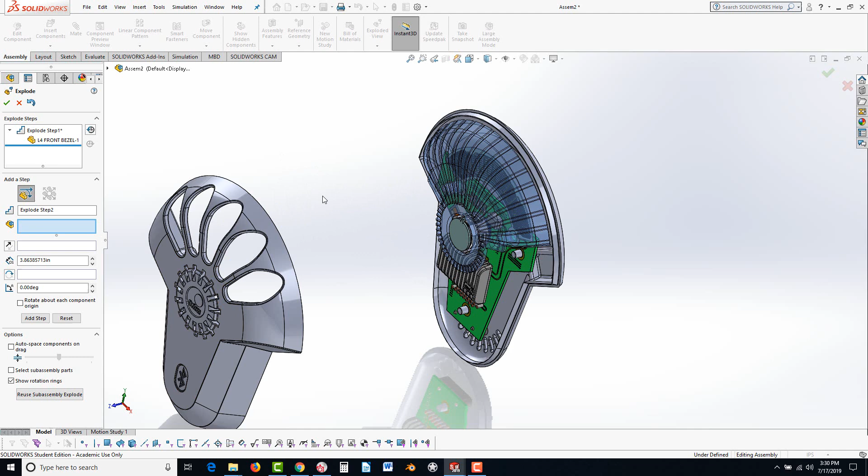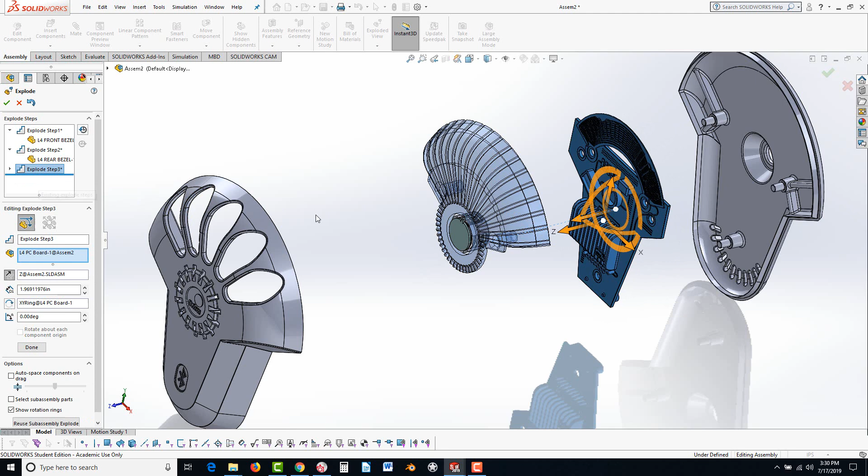I meant to deselect that, so I'm going to right click on that, delete the rear bezel from that. I'm going to click off of this, and I'm going to click on this one, drag it backwards 4 inches, and then click off of it. And unfortunately, I got to delete that one there. Okay, now I can click on it, drag it backwards, and then usually, let's see, let's hit OK.

And they seem to have changed the exploded view, the way it works a little bit, and it's just not working the way I had anticipated. So my apologies, I didn't practice this in advance. So, but basically, you can actually deselect and reselect them. I'm going to do that one more time.

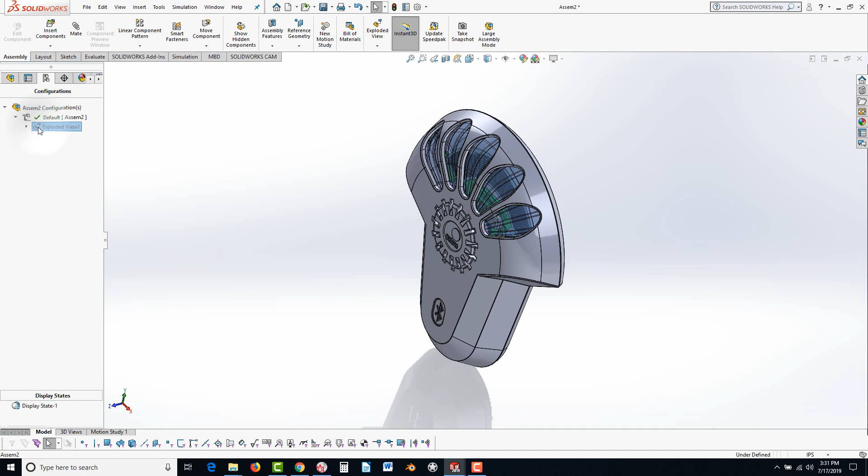Now you can actually edit the old exploded view if you go to Configuration Manager up here. Hit the little arrow to the left of that - there's the exploded. Just double click, or actually right click, and hit Explode. And now we should be able to select this and continue on. Let's see here, let's edit the feature. There we go.

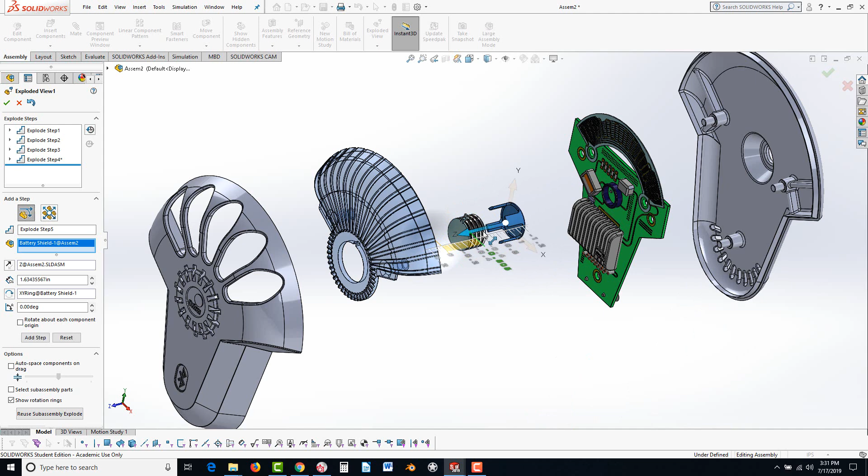Select this part, drag that forward. I'm going to right click to apply it, then I'm going to click on this, drag that back, right click to apply it, click on this, drag it forward, and again right click to apply. So that was what I was missing, was just a simple right click.

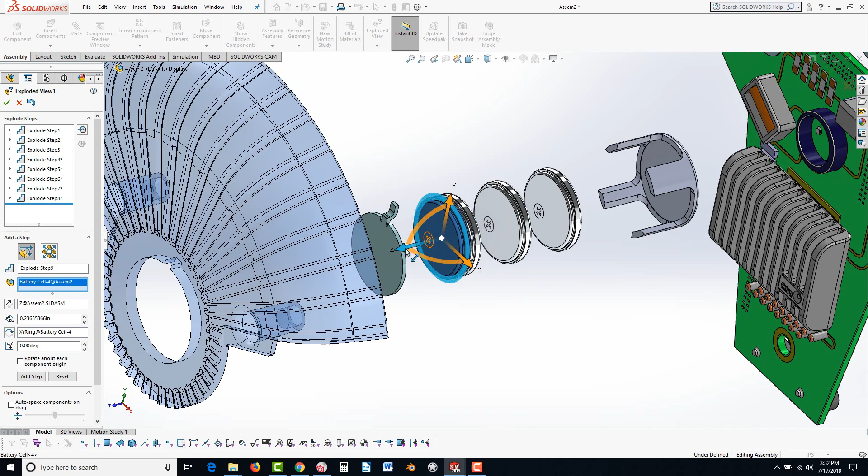Drag that back, right click to apply, drag this, right click to apply, hold that, drag that forward, right click to apply. And there we have our exploded view. Hit the green check. Be aware, if you go to exploded view, it will reset and create a new exploded view. It's a very nice tool, actually.

It might, for a new user, be a little bit of a challenge to understand, but what it's doing essentially is, so if you're making a catalog for assembly or disassembly of something, you can make multiple exploded views to demonstrate that. Then you're able to actually animate this.

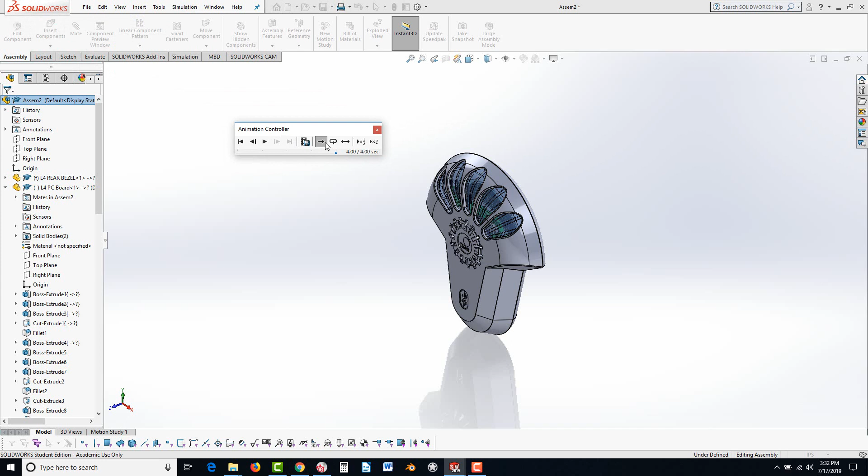So if you right click, and actually let's go back to the feature manager up here. Go to the very top, and if we right click at the top of the assembly, you'll see there's collapse, and there's also animate collapse, and you'll see it will animate this for us. With the animation controller, we have the ability to set it to reciprocate and hit play again - you'll see it will explode.

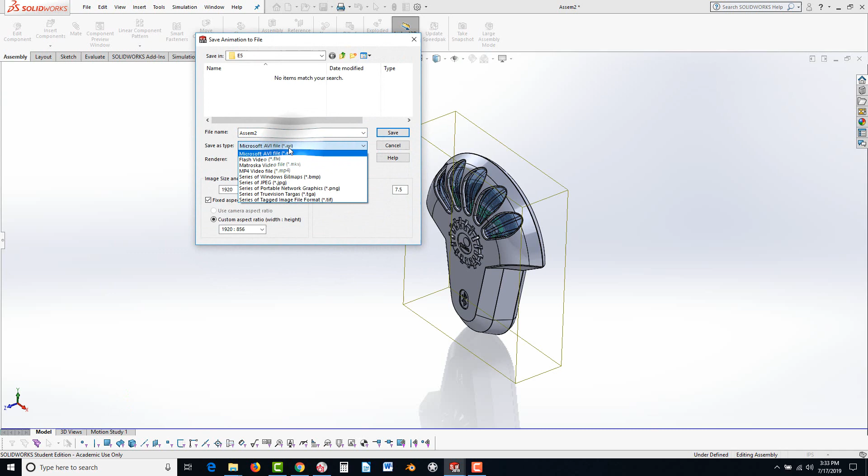We could have it at half the speed or twice the speed, and you could even do a loop. And then finally, you could save the animation and save it as an AVI, and there's a series of codecs depending upon what you might have on your system. You could output that for a video. And that concludes the lab.